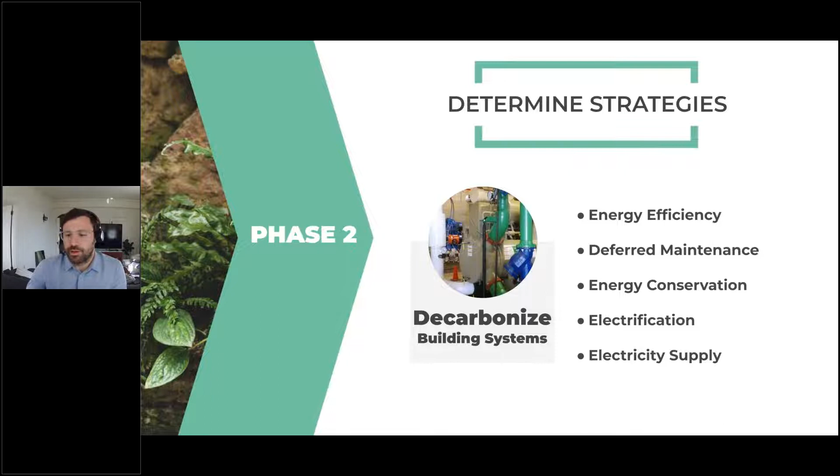So we'll go into a little bit more detail about some of those strategies, as well as how you can approach the planning phase in order to develop a roadmap of transitioning your facilities from the existing systems into more carbon neutral operations. So if we go to the next slide, I'm wanting to start with the overall framework for decarbonizing building systems. I think when we're looking at building systems, there's a lot of complexities around the infrastructure and how do you transition that. And I think we can break down decarbonizing buildings into sort of 3 main steps or strategies.

Within that framework, the first is we want to invest in cost-effective energy efficiency projects. I think the work that a lot of stadiums and sporting facilities have done around LED lighting continues to be cost-effective. The second is to electrify natural gas systems. So can we switch from fossil fuel-based natural gas heating to electric systems? And then third, can we procure or produce 100% clean electricity to supply those systems? And that will set the trajectory towards carbon neutral operations. I think in principle, it sounds simple. In practice, there's a lot of complexities around that.

Some of the considerations for sporting facilities specifically, or in general, is first we want to understand what are the goals, what are the key performance indicators, what are the policy risks. There's a lot of cities and municipalities that have established policies around electrifying buildings that would impact a sporting facility. And third, how can we develop a facility-specific decarbonization roadmap that'll guide future decisions? How do we align with equipment life cycles or the end of life? I think that's generally the most cost-effective way of decarbonizing infrastructure: if equipment is reaching its end of life and we're going to need to upgrade, what's the marginal cost of switching to a less carbon-intensive piece of equipment? How can we leverage other ongoing infrastructure upgrades?

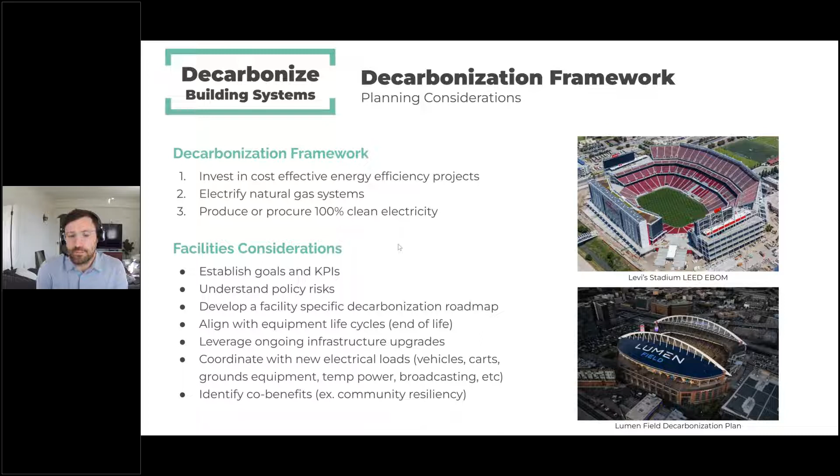If we go to the next slide, what does that planning process look like? If we start with a goal of reducing emissions, how do we take that and develop an action plan? And I think we can break this into sort of 4 main steps. The first is to measure and plan. So what are the goals of the organization? What are the key performance indicators that we want to keep track of? How are we going to be making decisions? And then how can we collect all the data that we need in order to assess strategies?

Then we want to look at what are the specific projects within a building that will help to reduce energy and carbon. So that can include energy efficiency, conservation, electrification. Based on all those projects, we want to do some scenario analysis and planning. So how should we be thinking about these projects long term? How does this align with our existing capital plans, our investments? And we want to look at how this aligns with existing equipment life.

If a boiler is going to be needing to be replaced in 5 years, we want to plan ahead so that we have assessed the opportunity to potentially electrify that piece of equipment. And then finally, how do we develop a monitoring and implementation plan? And I think often these projects, as far as fully transitioning to an all-electric building or to reducing emissions, is a long-term phased effort. So having this plan and having an idea of where you want to go in the future really helps to make decisions and then allows you to not invest in assets or equipment that might be obsolete in the future based on your carbon reduction goals.

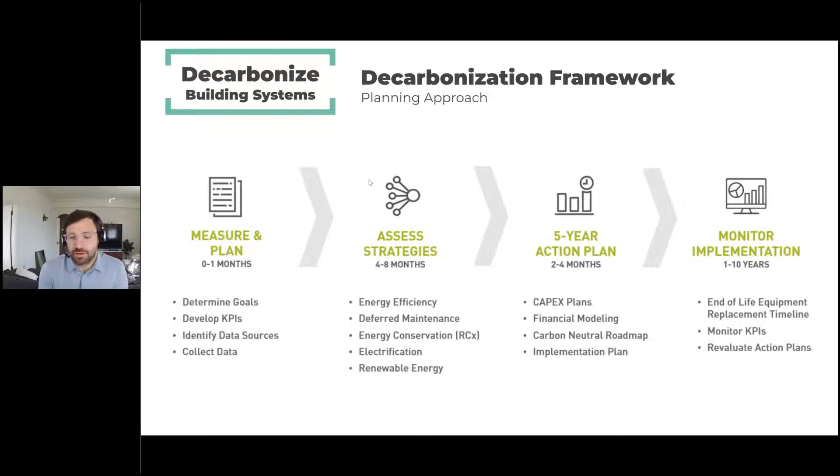So I think like Kristin mentioned, it starts with understanding what your emissions are, then what are the opportunities, and then how should we be implementing these opportunities over that next 5 to 10 years. Some of the specific strategies on the next slide around building decarbonization, we can break into 4 main categories. The first are traditional energy efficiency projects around LED lighting, retrofits, adjusting power factors, or energy conservation. So how are we scheduling the building? Stadiums are used very differently than other buildings. What are the energy management systems within the building? Can we provide retro commissioning?

Finally, electrification and electricity supply, which I think are newer strategies. Electrification is switching from natural gas-based heating systems to electricity. And then pairing with clean power allows for a building to be carbon neutral. And there's various ways that we can look at electricity, whether that's provided from the local utility. There's a lot of states within the US that are transitioning to clean power and have commitments to provide clean power. So for example, in California, there's a goal of being 100% clean power by 2045. There's other on and off-site strategies.

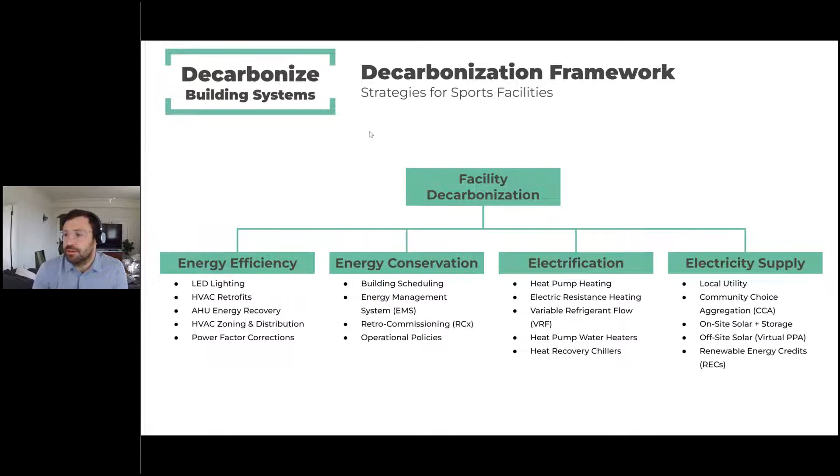The next slide shows the electric utility commitments throughout the US. Currently within the US, around 62% of electricity use is covered by a legally binding commitment from a utility to provide 100% clean power. And this covers a large portion of the United States. So we know that in the future, by 2045 or 2050, a large portion of the US will have access to clean power. So switching or planning to switch from natural gas to electricity provides a direct pathway for facilities and buildings to be carbon neutral in the future. So that's really important, and I think what's been driving the trend towards electrification.

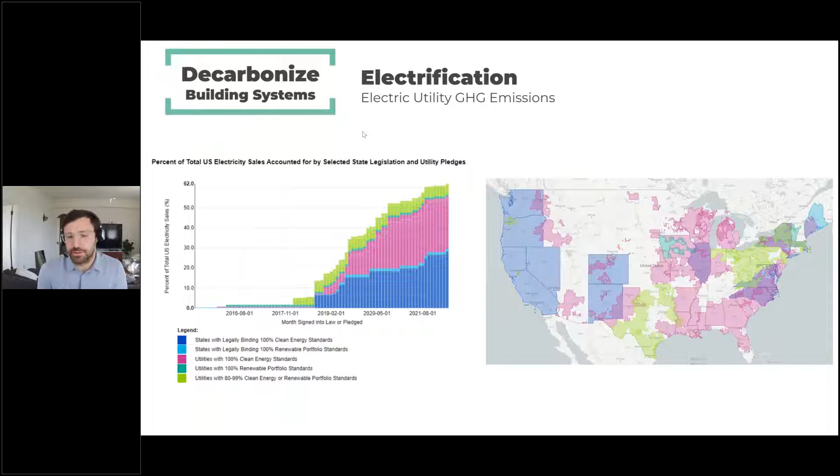So on the next slide, if we look at an individual building and we compare a fossil fuel-based system, your traditional system will use electricity for cooling, gas for heating. Under an all-electric system, you might have heat recovery or heat pumps, all electric sources. Based on average emissions factors in 2021 within California, your facility would see a roughly 30% reduction in greenhouse gas emissions. So it's a fairly significant amount. But what's important is to look at that over the life of that equipment for the next 30 years as you're continuing to operate those chillers, those boilers, or other equipment within the building. So on the next slide, we'll see what that emissions looks like over time.

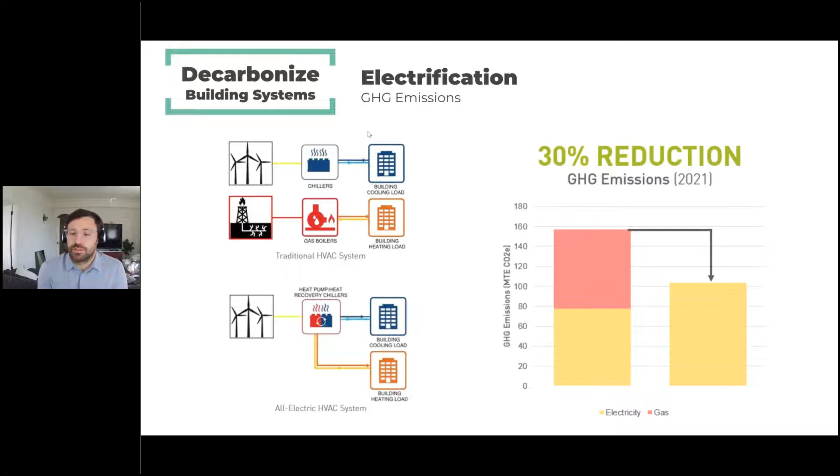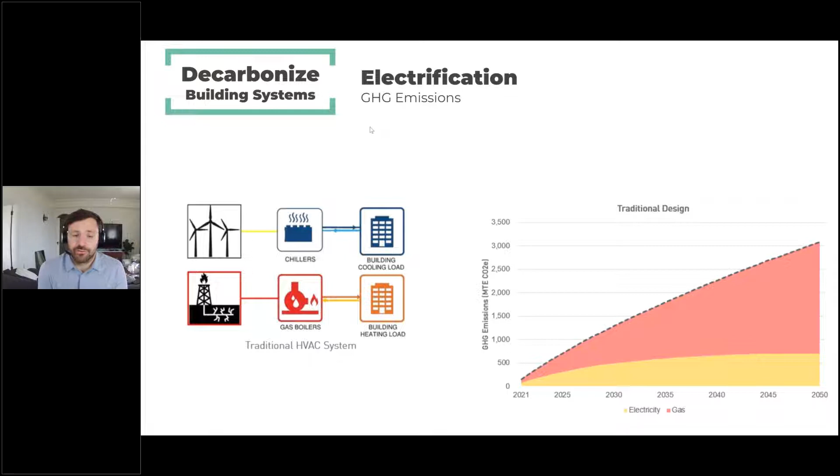As the grid transitions to clean power, you can see in yellow the emissions associated with electricity trend towards zero, while the natural gas continues through the life of that equipment. Now let's look at if we had an all-electric system. So on the next slide, we can see what transitioning to all-electric looks like. By 2045, we have clean power. What we'll see is over that 30-year period, we'll actually see a 70% reduction in emissions. So it's really important to look at how our decisions made today are impacting the life cycle emissions, not just based on emissions factors for the current utility grid.

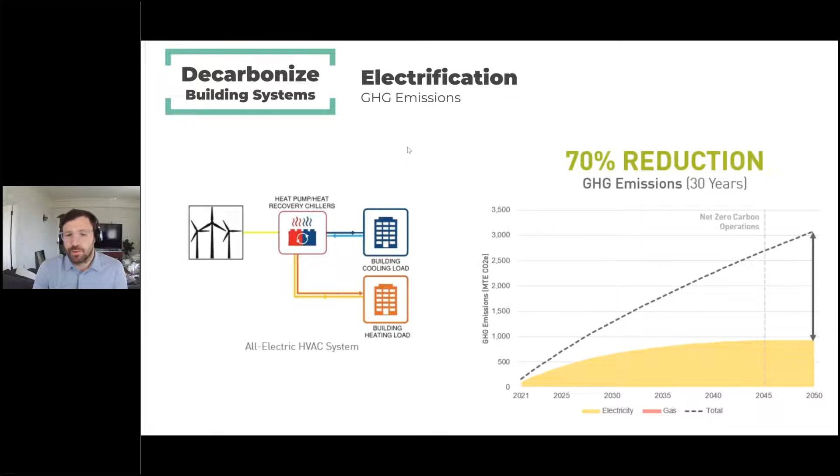So diving into electrification and what those projects specifically look like. On the next slide, I think a good way to think about electrification is in three main categories. The first is your central utility plant. So if you have centralized heating and cooling systems, how do you transition those to heat recovery chillers? You can look at geothermal, electric boilers, or heat pumps. Second, distributed heating. So how do we look at heating and cooling equipment that might be spread out throughout a facility? And then third, water heaters. Breaking down all of the existing equipment and infrastructure within your building, categorizing what equipment uses natural gas, and then going through the exercise of doing the engineering and financial feasibility can lead towards the potential future projects that we can look at for a facility.

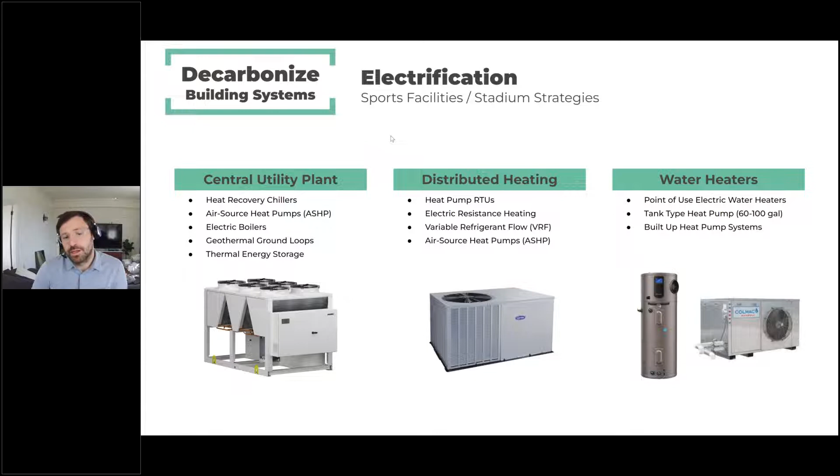The central utility plants are generally the most challenging and the most capitally intensive projects. So on the next slide, we've broken down how we've approached and would recommend approaching electrifying central utility plants. At the core is improving building efficiency. So we want to reduce loads. That is your traditional energy efficiency and deferred maintenance projects.

Next, we want to look at maximizing heat recovery. So how can we recapture heat? Third, how do we optimize those systems? And then finally, how do we provide additional heating sources in order to get towards carbon neutral? And those we want to minimize as much as possible since they're generally the more capitally intensive projects.

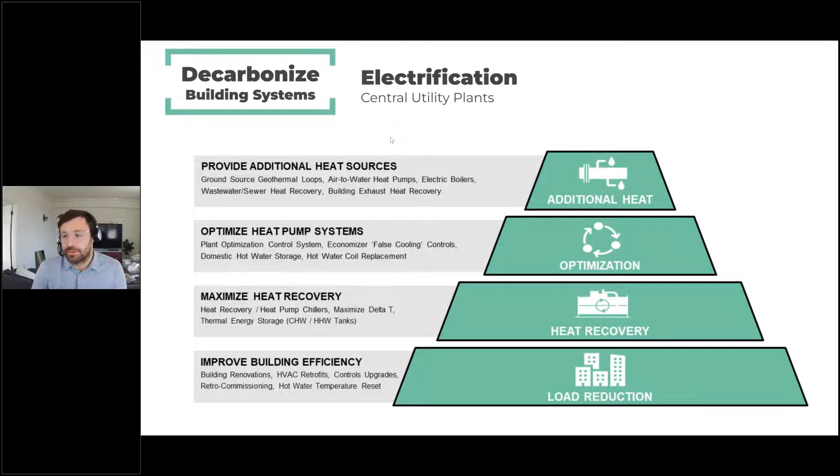And on the next slide, we'll show sort of what a traditional or typical central utility plant system looks like compared to an all-electric plant. Everything within the building can potentially remain the same, and we're switching out those natural gas boilers to electric heating systems around heat recovery chillers or heat pumps.

So I think the central utility plant is certainly an area that would warrant a specific focus and attention in order to make sure that you're aligning with equipment replacements and the general maintenance practices so that you can identify opportunities before they come up. With that, I will hand it back over to Kristin.

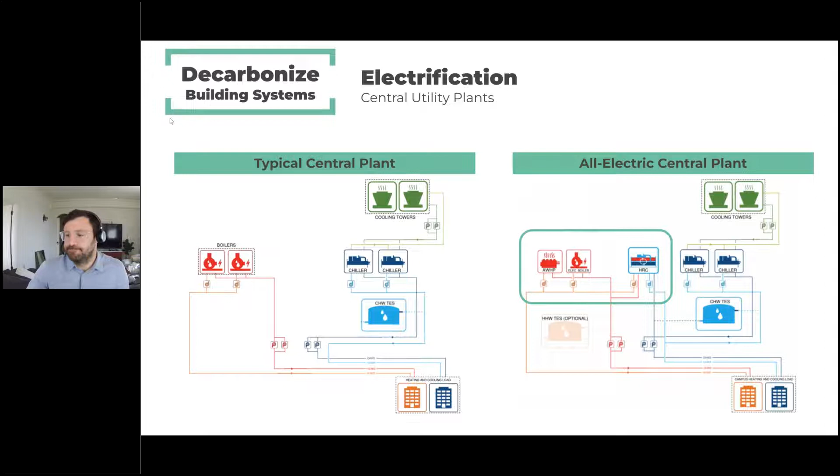Thank you. Get my camera set back up.

Okay. Well, I appreciate that, Brian. You covered some of the stuff that I was going to cover as well, but I think just how do you take this planning process and consider solar, consider transitioning fleet, consider electrification, and how do you prioritize it over time? So I was just going to give you a few recommendations. One, obviously, is to look internally at your building policies, potentially creating a no new gas policy by updating venue design standards to support electrification moving forward.

There's also ideas around bulk procurement strategies for solar. Bulk strategies can play a role in prioritizing solar. So if your venue is located, for example, in a city that is also considering solar development, there might be an option to bundle all of those projects together to save on price. You could also check with your local utility and see what projects they are installing regionally, especially if you have a community choice energy partner in your community.

The other is, as I mentioned, to align the capital improvement plan budget. This should be the basis for prioritizing energy efficiency infrastructure. And if the capital improvement plan doesn't get you over the finish line, you could consider assessing third-party financing, such as ESCOs, or in some markets they have on-bill financing through utilities. So those are just some ideas. And then next, we're gonna go to Andrew, who's gonna talk briefly about the awesome things that are happening at Mercedes-Benz Stadium.